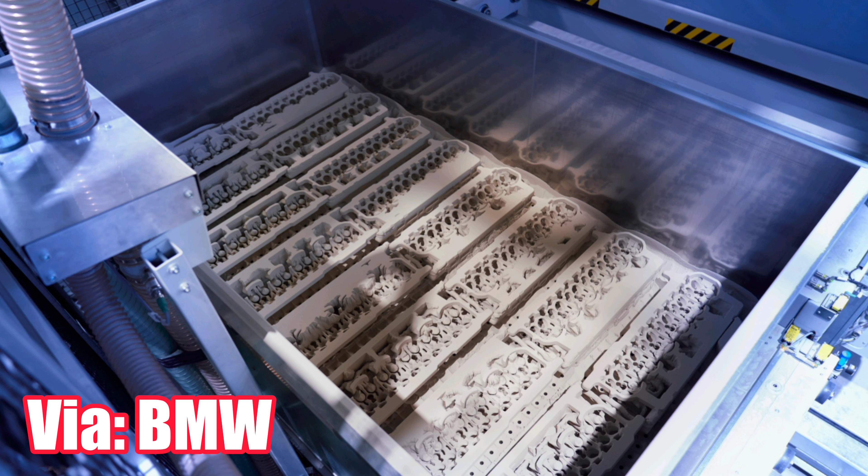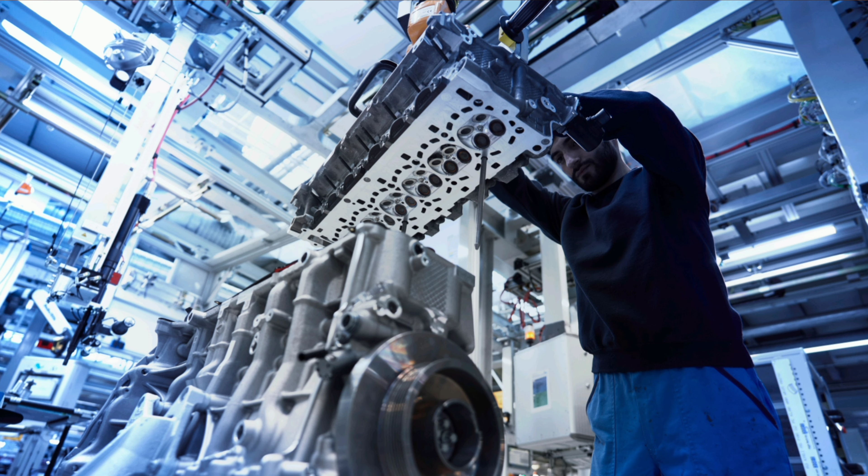So starting off at the top, when we look at the cylinder head, I thought it was really interesting that this is a 3D printed cylinder head. They used additive manufacturing to make it, and it allows them to create much more complex geometries than you'd be able to do with typical casting. Afterwards, they did the final machining for all the mating surfaces so it could be sealed up, but it helped reduce the weight and again just helped them create an optimal design for all of the oil flow and coolant flow and things they wanted it to be capable of.

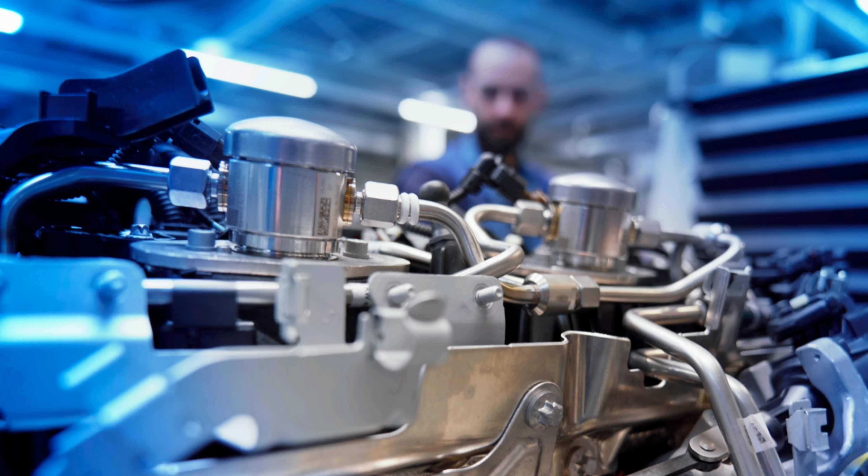It also supports 2 high pressure fuel pumps, which you guys might know from the S55 - they've been doing this on their twin turbo M series engines. So now the S58 is no different. It has two high pressure fuel pumps mounted on top of the cylinder head to support the fuel requirements going to the 6 injectors.

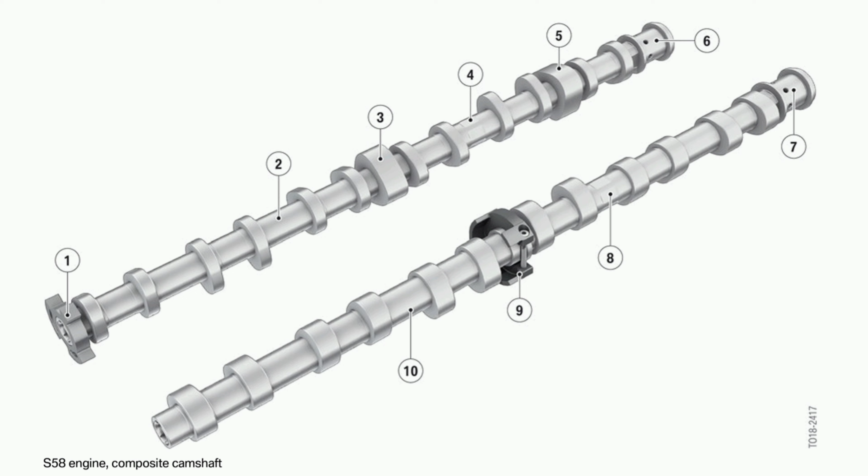Now, of course, this requires an optimized exhaust cam. So the exhaust cam now has 2 high pressure fuel pump lobes instead of 1. This is something where a lot of people have asked, can we retrofit the S58 cylinder head onto the B58, or retrofit this dual high pressure fuel pump setup? But because of the cams and everything that feeds into it, it's not really something that's very likely. And a lot of other things like port injection get past our fuel limits anyway.

So it doesn't really seem like a viable option as an upgrade for a B58, but for the S58, it does explain why it's able to support so much power on a stock fuel system.

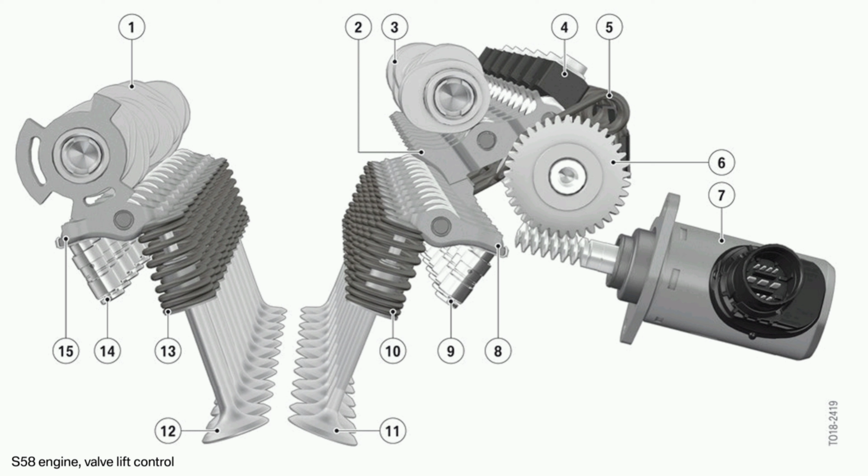Now, because of the higher horsepower rating, they also upgraded the valve train, so the valves are designed to handle additional heat. Just because the combustion pressures and everything inside the engine are greater to support the horsepower, they've also increased from a 3-layer head gasket to a 4-layer head gasket, to support the higher horsepower rating.

And another thing they added is larger coolant ports, to support the higher heat and stresses the engine's going to be supporting, being capable of over 500 horsepower. With those bigger coolant ports, it's going to have an easier job keeping everything cool and at an ideal operating temperature range.

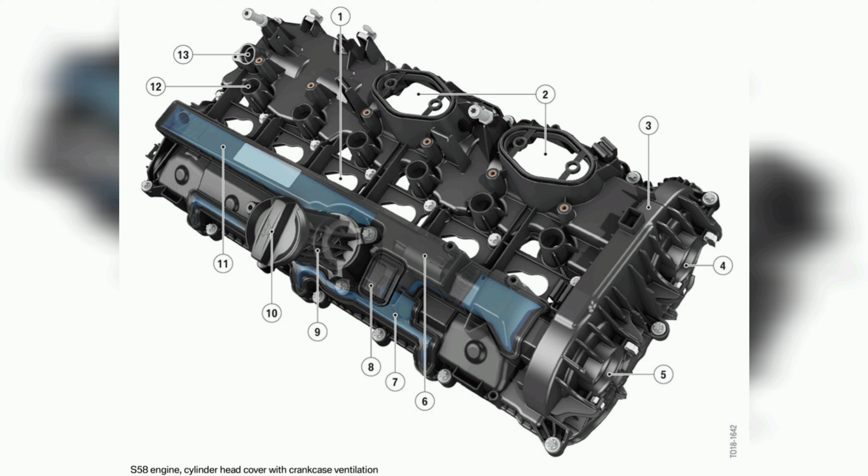Now, just like the B58 TU, the S58 valve cover has the PCV system built into it, so it's not something separate that you can modify or replace. It works just like pretty much all the latest BMW engines.

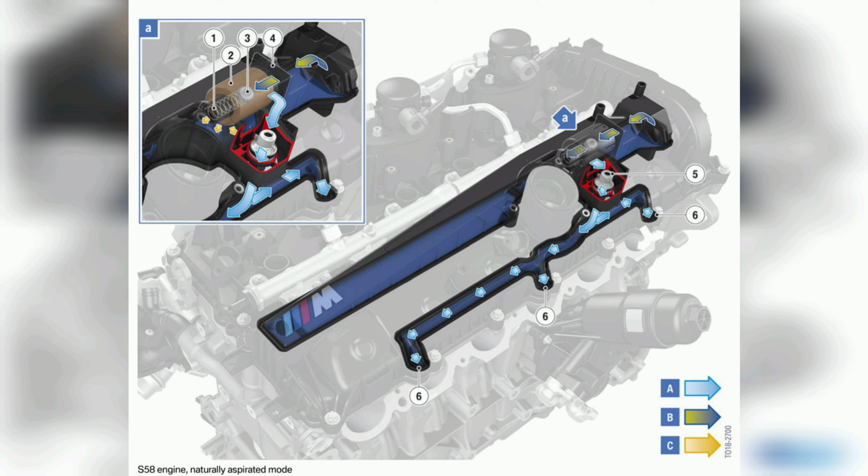Under vacuum, it's going to route all those PCV gases to the head ports and directly back into the intake. But if you're in boost, it shuts that off and routes all the PCV gases back to the intake before the turbo.

Thankfully, I haven't seen a lot of big issues on these engines with the PCV, other than running high boost can damage the valve cover. But if you were to have an issue, you're going to have to replace the entire valve cover itself. You can't just replace the diaphragm like you can on a Gen 1 B58.

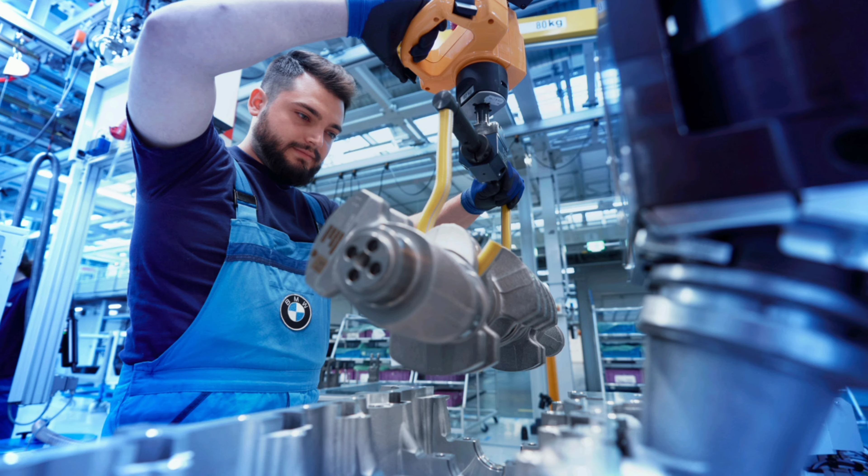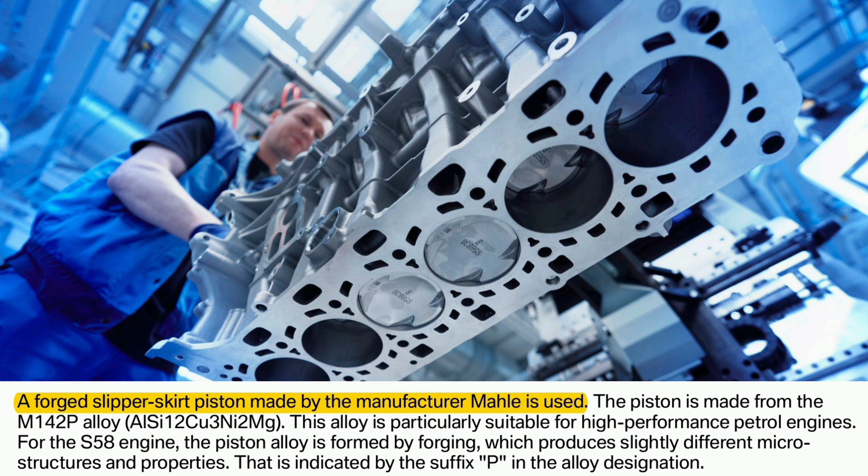Now, moving down to the engine block, it does also have a lot of upgraded components. All of the internals are forged, so you'll find a forged lightweight crankshaft, as well as forged pistons from the factory. These are actually made by Mahle, so if you guys are looking at aftermarket pistons, they're a pretty common company that sells pistons for various platforms, and this car already comes with forged pistons from the factory.

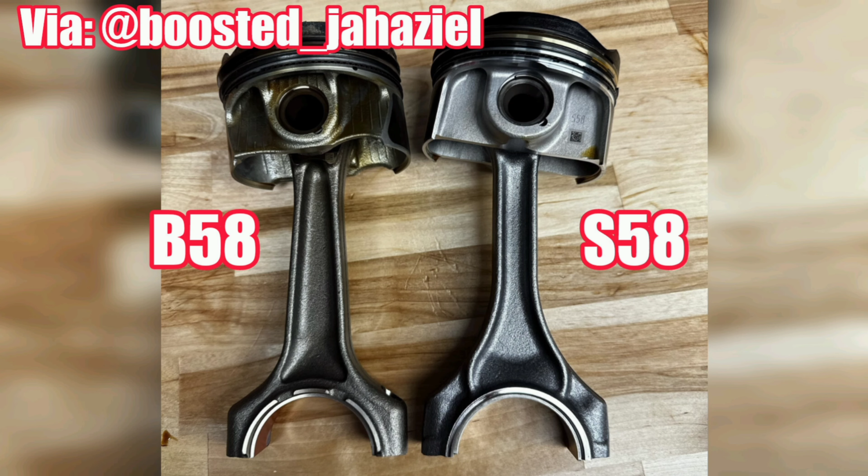And we've also noticed that they are not using the coated rod bearings anymore. The ones on the B58 that make it so good, last so long, and handle so much power—on the S58, they went back to a different material that has some of the same properties, but it doesn't quite seem to have the same resistance to wear as the coated bearings on the B58.

So we'll be keeping an eye on that as the S58 gets older. I haven't heard of a lot of rod bearing issues yet, but some of the people that have built their engines pulled their rod bearings, and it does show some signs of wear. So we'll kind of see as time goes on.

This engine also has lower compression than the B58 TU. With the 6-port TU, we went from 11:1 to 10.2:1. And now going to the S58, it has a 9.3:1 compression ratio. This lower compression allows it to safely handle more boost and make more power without damaging those potentially weaker connecting rods.

Now, as far as turbos go, this car actually has twin turbos—2 single scroll turbos. Each one is attached to 3 of the cylinders, and it kind of makes a unique intake setup. You can see basically the 2 intakes are fighting for space to squeeze down there.

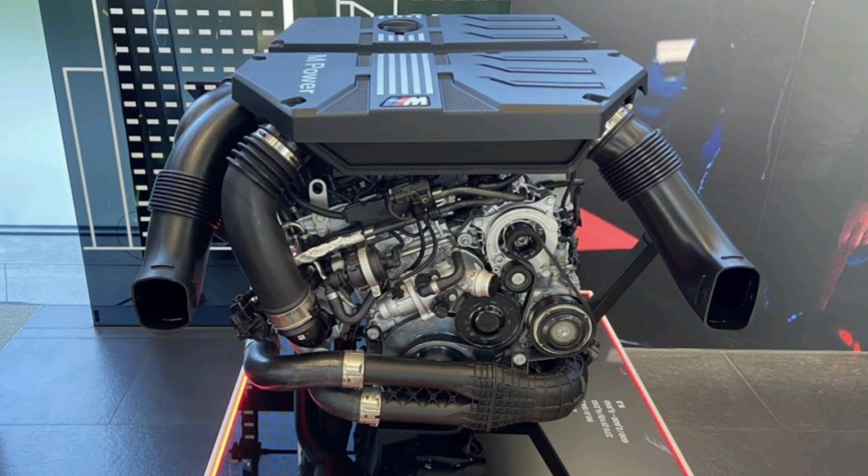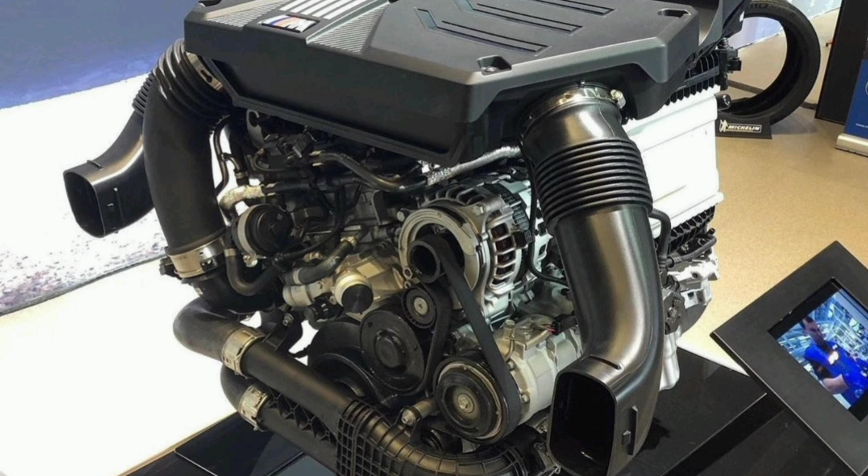And then you've got 2 charge pipe exits out of the turbos that combine into one. That connects to the throttle body that goes to your intake manifold, with an integrated intercooler built in—an air to water intercooler, just like a B58.

But this one has the exposed metal, so it seems like it should be able to do a better job of cooling. And then it comes up to the 6 ports that route it back into the cylinder head.

Now let's talk about oiling, because this was a big point of discussion on the S55. A lot of you guys know on the N55, it could potentially run into oil starvation issues around high-speed turns. So the S55 upgraded their oiling system to avoid that problem.

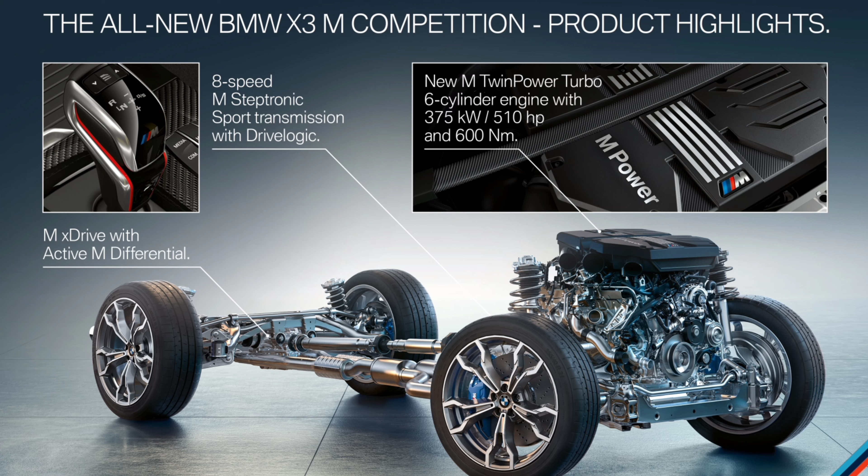Now the S58 does have similar upgrades, although they take a little bit of a different strategy because there was a lot of concern apparently with the oil pan. This was the first time BMW was putting an inline 6-cylinder in an M series engine that needed to compensate for xDrive. And so they pointed out that with the oil pan, there's basically a big hole in it for the axles to be able to reach both wheels.

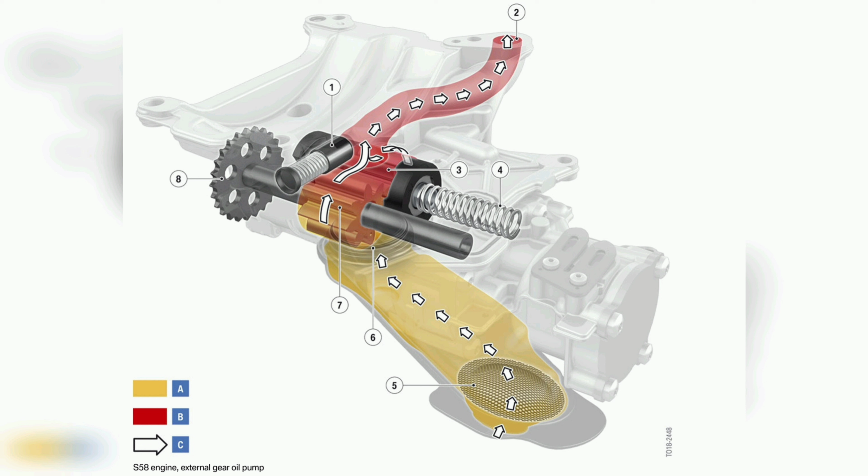So they needed some way to compensate for having the oil pan basically split in half so that it could have adequate oiling around the pickup and handle high-speed turns. They have the main pump that pulls from the pickup at the back of the engine. That's where majority of the oil will be if you're doing really hard acceleration or just daily driving. It has no problem picking up oil.

However, there are 2 big issues that they ran into. One was heavy braking, which obviously these cars come with really big brakes, a lot of tire. And so if you brake really hard and all the oil sloshes to the front of the car, you want to make sure that you still get adequate oil. The other one is, of course, high-speed turns. So if you're handling up to 1.3 G left or right, they compensated with that in the oiling system as well.

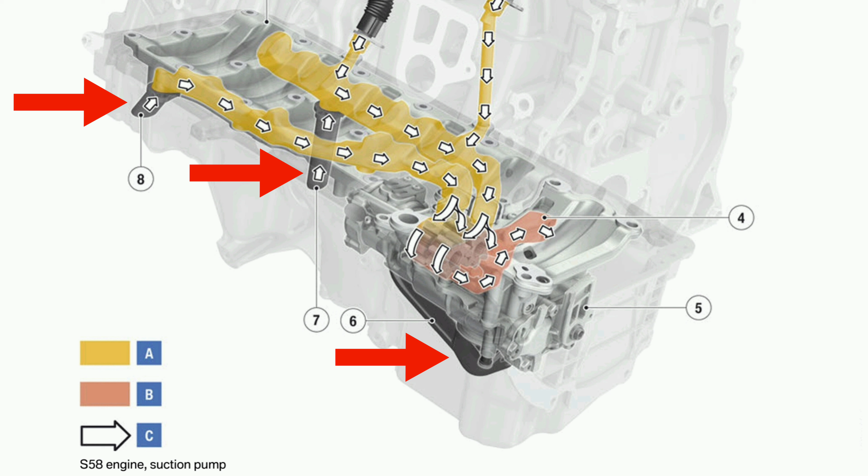So what we have going on are 3 oil pickups. There's one at the back of the engine, one at the front left, and one at the front right. And this helps avoid those issues with heavy braking. So now they have one all the way at the front of the engine that can pick up oil. And also it helps transfer oil from the front of the oil pan to the back of the oil pan.

So those pickups don't actually go straight up to the engine. It's just kind of pushing oil back to the main pickup so that it can plumb oil up to the engine and lubricate all of your internal components.

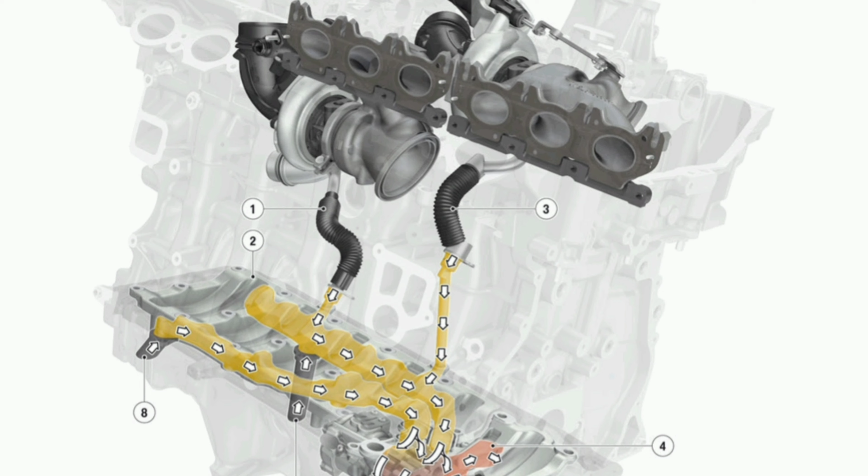It also has a scavenging system built into the turbos. So the oil drains that come down from the turbos actually plumb directly into the oil system. And the thought process here is if you're going through like a high-speed left turn, for example, all of the oil is going to slosh to the right of the oil pan, and that's where your turbos are.

Now, the drain from the turbo is passive, so it just drops due to gravity. But if the high Gs are causing all the oil to pull up on the right side, it can basically sit in the turbo and cook the turbo and damage the internals. So the scavenging pump is actually sucking the oil out to make sure that oil is flowing through the turbos and going back into the oil pan so that it can recirculate through your engine. So now they're not just protecting your rod bearings and engine internals, but it's protecting your turbo as well.

So again, I highly recommend checking out the technical training. They go into a lot of detail on this. There are multiple pages dedicated to just the oiling setup and how everything routes, where oil is being pulled from, where oil is being pushed to. And it's a really complex system for sure, but it seems like it's doing a great job of supporting the added stresses that come from having an X-drive car with big brakes and a lot of power when it's going around a track.

Now, from a cooling standpoint, of course, they improved that as well. So they have a higher flowing water pump, as well as, again, the larger coolant ports throughout the engine to help keep the engine cool.

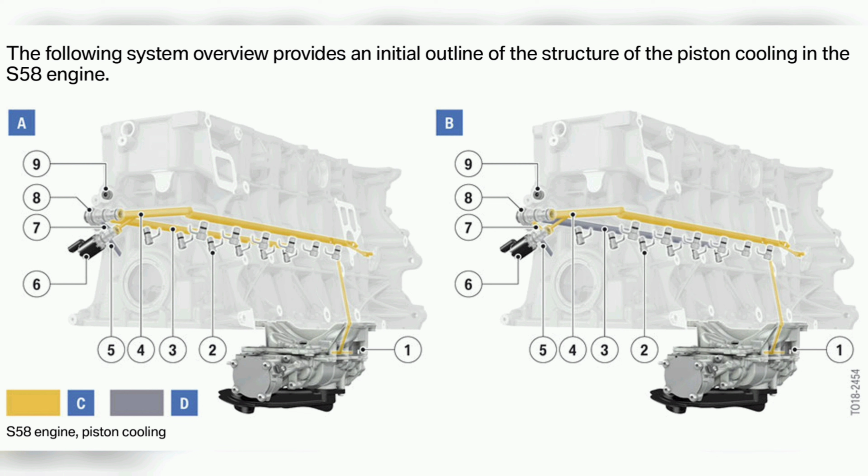From an oiling standpoint, they added additional piston oil squirters. So underneath the pistons, you have 2 instead of 1. The second one only activates when needed, but in those high load scenarios, you have additional oil spraying on the bottom of the pistons to keep your cylinders cool.

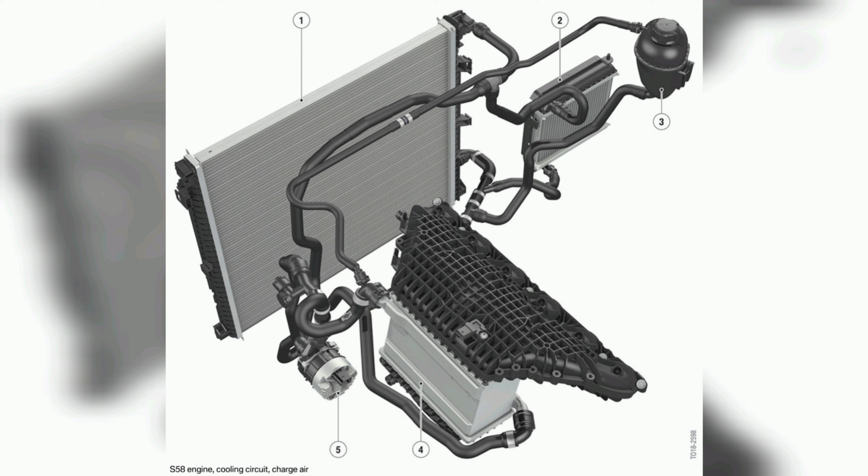From a heat exchanger standpoint, it also has an upgraded setup. It has multiple heat exchangers across the front of the car that support multiple purposes. There's the big main radiator in the front grills, which helps keep everything cool, but this one is dedicated to the intake manifold to keep your intercooler cool. They also use one of the auxiliary radiators for that intercooler circuit as well, so now you have 2 intercooler heat exchangers that give you additional cooling capacity.

It also has another main radiator for the engine and an auxiliary radiator, and then it has an oil cooler down at the bottom of the car.

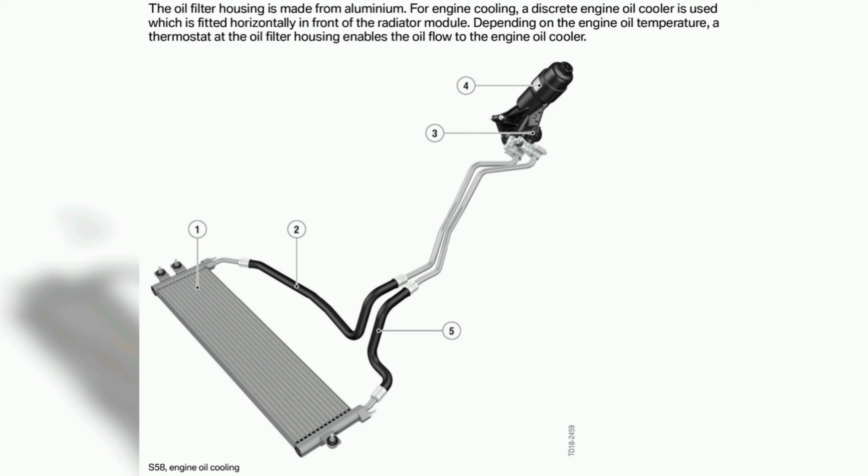This one, you kind of see mixed reviews on it because it's so close to the ground and it can easily be punctured by a rock or something as you're driving over it and dump all your oil on the ground. But keep in mind, this does have a thermostat built in, so it only routes oil to that heat exchanger depending on your high oil temps. So yeah, it's definitely a risky position to put it in, and I know a lot of people like to put grills and protective covers over it to prevent damage, but it seems to work really well at keeping your oil cool even in the most stressful scenarios.

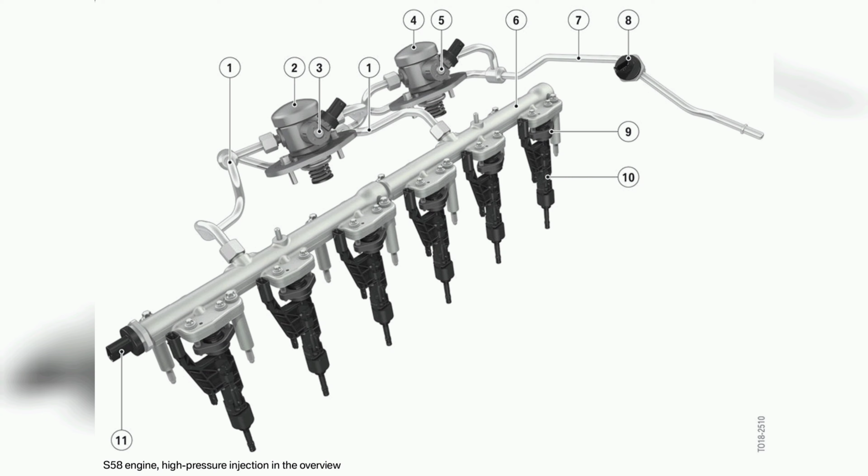And then one last thing we want to talk about are injectors. I know this is becoming more and more of a talking point for the TU guys. Now that you have high pressure fuel pump upgrades and stuff, a lot of you are looking at ways to stay DI only without adding port injection. And I will say it seems like the injectors do flow more than the B58 TU.

Granted, the B58 TU has injectors that are kind of weak. They don't flow as much as a Gen 1 injector. So for some reason it flows a little bit less, even though it has a higher flowing high pressure fuel pump. But the S58 injectors do seem to be able to plug in and work just fine.

Although I'm not sure how much more horsepower capacity it gives you. I've seen people on the stock injectors make anywhere from 550 to 600 horsepower, and it seems like the S58 injectors are rated for like plus 30%. So that would mean it could make almost 800 horsepower with just S58 injectors. I haven't seen that result, I'm not sure if you guys have, let me know. But it definitely does seem like it gives you a little more headroom if you want to avoid going with port injection.

Also, from a fueling standpoint, something nice to see is that we have a low pressure fuel system with a fuel pressure sensor now. A lot of us have added fuel pressure sensors when we add our Motiv ReFlex so that we can actually see what's going on that side of the system. The S58 comes with it from the factory, so you can see it in your logs, even on a completely stock tune without any additional Motiv ReFlex or anything like that. Really cool to see that capability out of the box.

But yeah, those are some of the cooler details I thought about the S58. Again, feel free to read through the article. Let me know if there's anything you think I missed or something that's noteworthy. But overall, the S58 is definitely a tank, and I can't wait to see what the S58 TU can do.